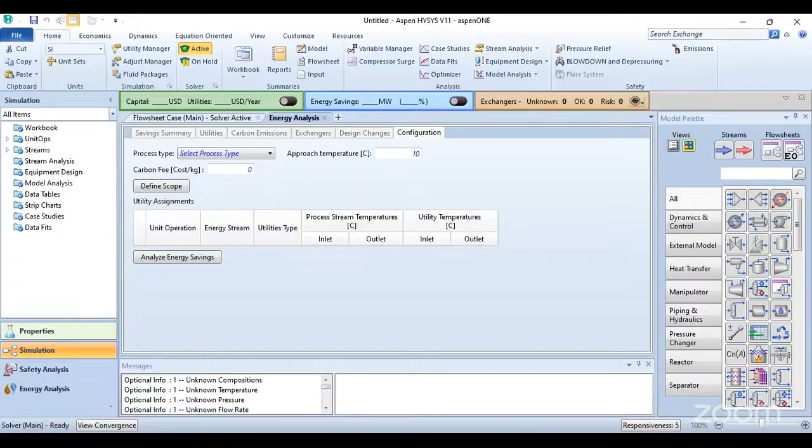So secondly, I would also like to know if you have used Aspen Hysys before, or rate yourself. Are you beginners, intermediate, or advanced? But I know that there are some professionals that are also joining this session. So I would like to know if you're a professional, a beginner, or you have intermediate knowledge. If you also haven't used Aspen Hysys before, I would also like you to indicate, so that I know how I will break down the class. If I know that more persons are beginners, I'm going to take it at beginners level. But if I know that there are more advanced persons here, I don't need to start teaching them beginners stuff.

So yeah, those of you just joining, I would also like you to introduce yourself. Are you a student, a graduate, you're working? Okay, we have more beginners in training. Wow, that's good. Okay. Wow. Okay. We have someone from Cameroon. Sixtus. Wow. Nice meeting you, Sixtus. You said you're a student. What course are you studying? Chemical engineering, petroleum, gas engineering? What course exactly are you studying? So for those of you that are chemical engineering inclined, or you studied chemical engineering, please indicate, be it undergraduate or graduate. Then those in petroleum also indicate. So represent the department or your course of specialization in the chat box.

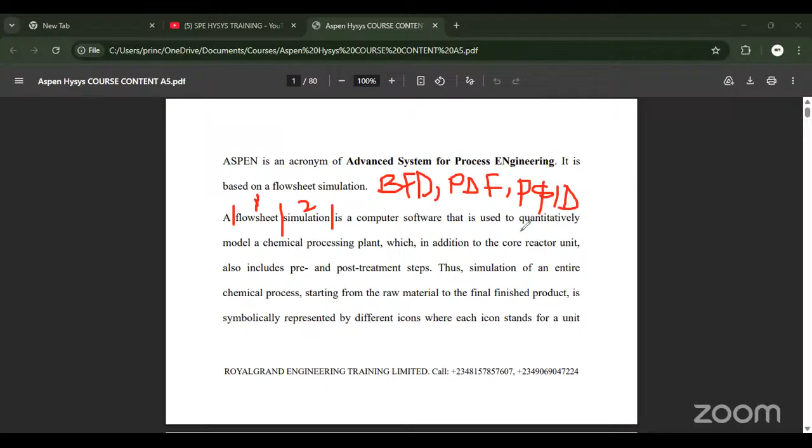We have our BFD. We have our PFD. So I would like someone to tell me the full meaning of this PFD. And we also have P and ID. So these three are diagrams that show you stages of a process. Now, I would love someone to tell me the full meaning of BFD, that of PFD, not PDF rather, PFD, and P and ID. So I'll be waiting for that in the comment section.

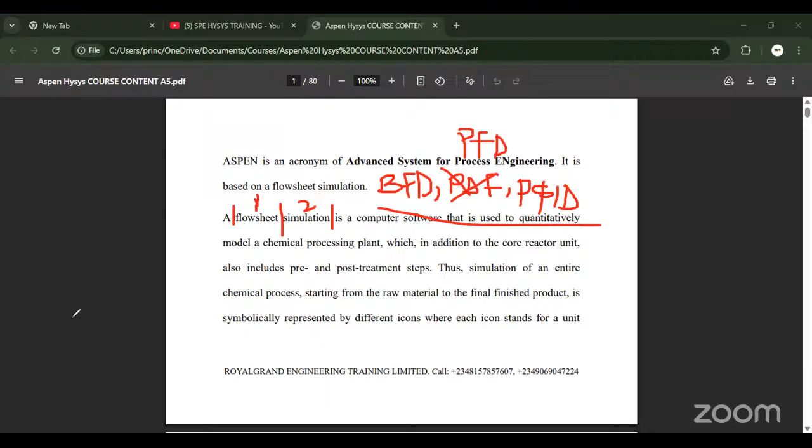So while I'm waiting for your input, I want this class to be interactive. Now we are also going to look at a simulation. When you say simulation, what does simulation mean? So what does a simulation mean? A simulation is basically trying to replicate how a system in reality is going to work in a virtual space.

So I'm going to pick examples that are outside engineering. For instance, let's use road safety or car riding. We want to know the impact a car is going to have when it collides with another car, maybe running at 150 miles per hour. Now, we won't carry somebody like, let's use Francis. Yeah, Francis, identify yourself. We won't tell Francis, come and drive a Lamborghini and make sure that you are riding at 150 miles per hour.

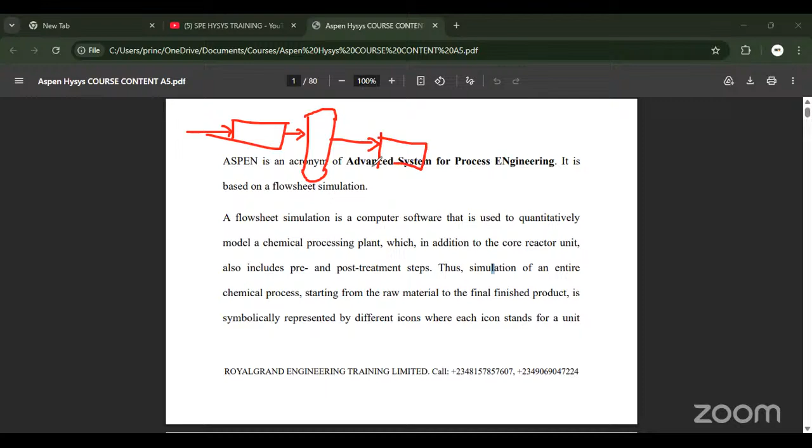This is the steps. So we have something like this. Basically, you all must have seen a PFD before. You have some of that in here, whatever this is going to represent. Then we have our output. This entire process from here up to this point is the processing. This is where processing comes in. Then you have here inputs. So that's what we are saying here: simulating an entire process starting from the raw material up to the finished product.

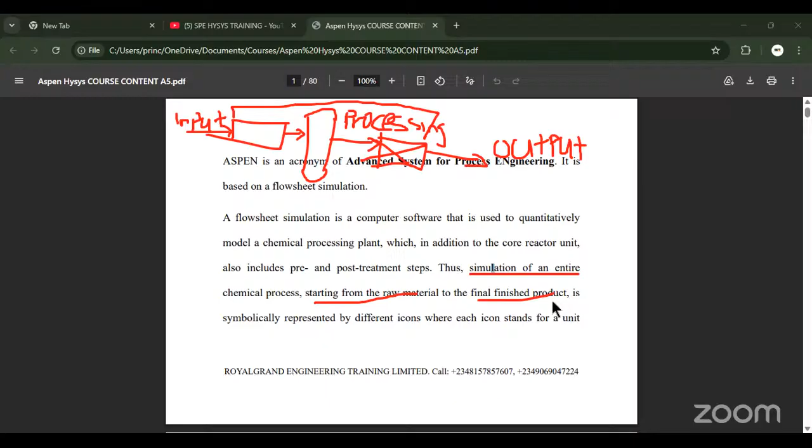And it is symbolically represented by icons. So if you have seen a PFD before, process flow diagram, it is represented by icons. Those machines, your furnace, your separator, your heater, your heat exchanger, your cooler, your compressor, your pump, all those things are represented by an icon. This icon represents each unit or each equipment.

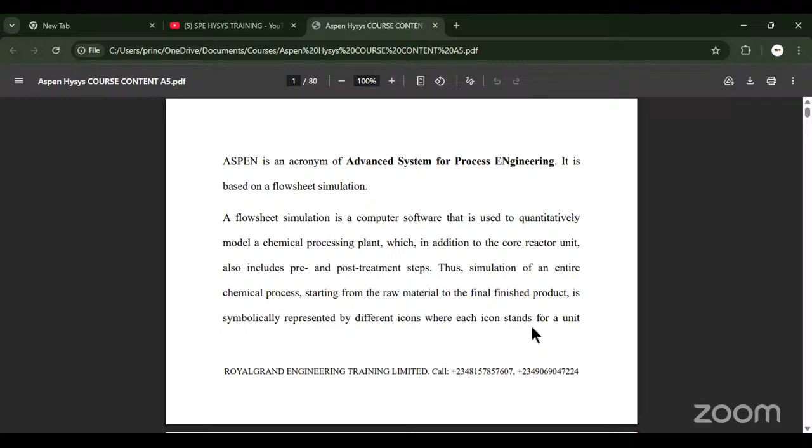Each icon stands for a unit operation, chemical process, input and output material stream. Now, in order for me to know that you guys are following, what's the difference between a unit operation and a chemical process, or a unit operation and a unit process? We can call this unit process. So what's the difference between a unit operation and a unit process?

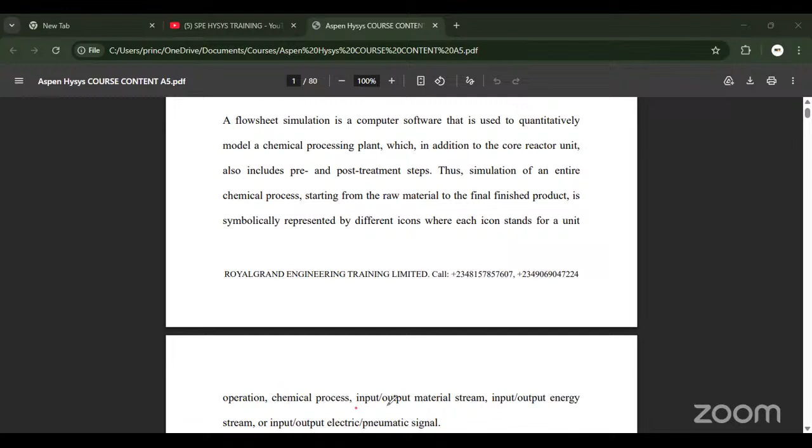HYSYS is basically just one part of the entire system. You cannot model or simulate what you don't understand. Now, imagine if you had not gone through university and somebody is saying something like a feed, the feed, design basis - you won't understand those stuff. You can train anyone, maybe an O-level, yes, this is the icon, if you want to add something use this, click here, click here. But that does not mean that person is a chemical engineer. It does not mean that person is a process simulation engineer. It's for you to know the core basics, the foundation, the intricacies of chemical engineering, those theoretical aspects. So all these are necessary, and that's why I need to start from the basics to make sure everyone is following. We all know what is input and output material stream, input and output energy stream. Clear, all this?

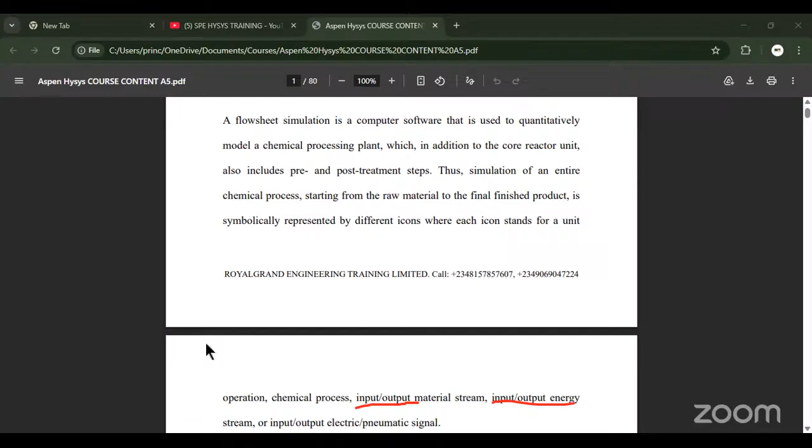Okay, now why HYSYS? What does it enable us to do? One, it helps us conduct what-if tests. This what-if test can be seen when you are doing your PSV, which is a pressure safety valve. You want to do your PSV sizing, that's for safety analysis. You are going to carry out some scenarios like: if there is over-pressurization in our separator, what happens? What if there is a fire incident? What if there is over-pressurization? What if there is flooding? What if - so you can use HYSYS to do that.

Design specification: our pump is operating and requires this heat duty. Now we need to design this pump to know its operation curve and give it to the mechanical guys for them to do procurement. Also design specification for our distillation column: how many stages? If we know the amount of stages we need, we can design it. Or if we don't know the amount of stages, what amount of stages will give us this percentage purity?

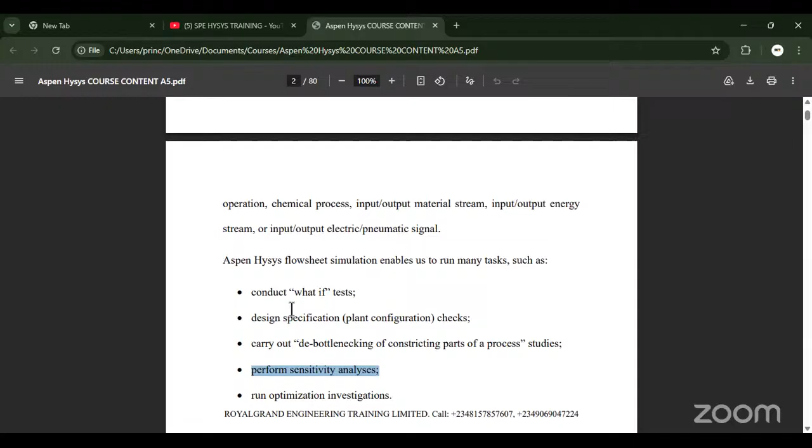Then running optimization investigation also. So we can also design better plants and increase profitability.

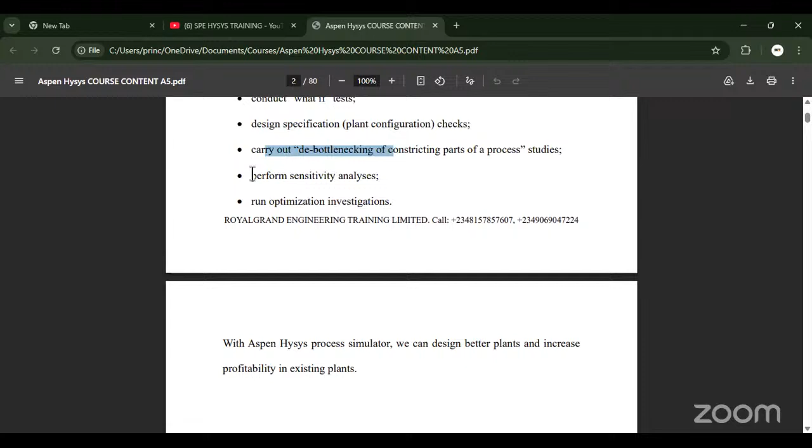Now imagine if previously this train was giving us 8,000, and after we carried out the simulation, carried out the de-bottlenecking, performed sensitivity analysis, and ran optimization investigations, we are now able to get 10,000 barrels per day. First of all, we have designed a better plant. We have also increased the profitability of that existing plant.

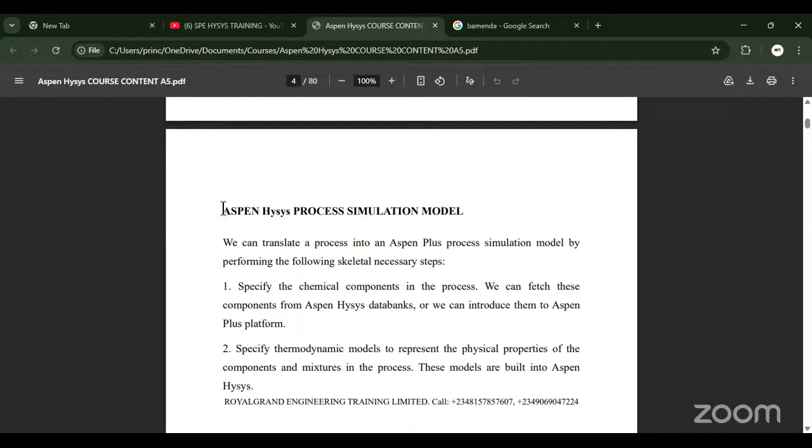Okay, so as Aspen Hysys process simulation, you can translate the simulation model, or you can carry out a simulation by doing the following. There are 5 steps in this. So the first step is to specify the component. In order for you to do that, we have an Aspen Hysys database.

Specify the thermodynamic model to represent the physical properties of the components and mixtures in the process. This is the second step that needs to be taken. More explanation on the thermodynamic model will take place in the paid class which I talked about.

So now this second step is very vital. We all know that if you are solving the wrong question, you cannot get the right answer. An Aspen Hysys thermodynamic model is basically the center point, the center of everything that you are doing in Aspen Hysys. If you pick the wrong thermodynamic model, every simulation you carry out from beginning to end is going to be wrong. So knowing the correct thermodynamic model saves you a lot.

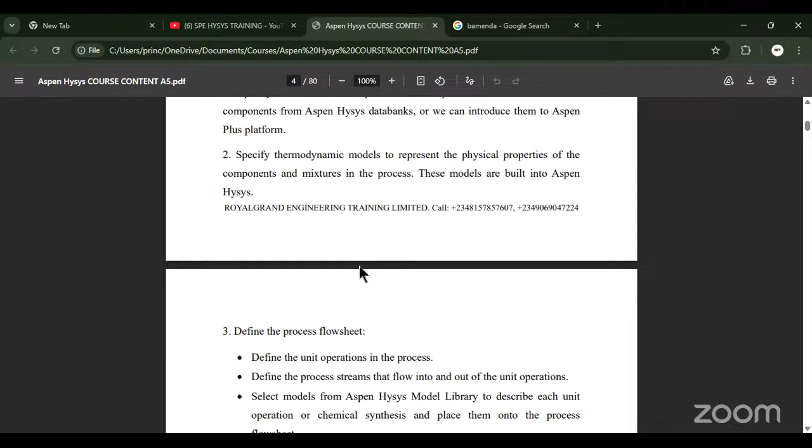So there are standards to all this. For those of you in the oil and gas sector, there are specific thermodynamic models we use. If you miss it, you have missed it. We are going to go deeper into that and explain it fully in the main session that is coming up.

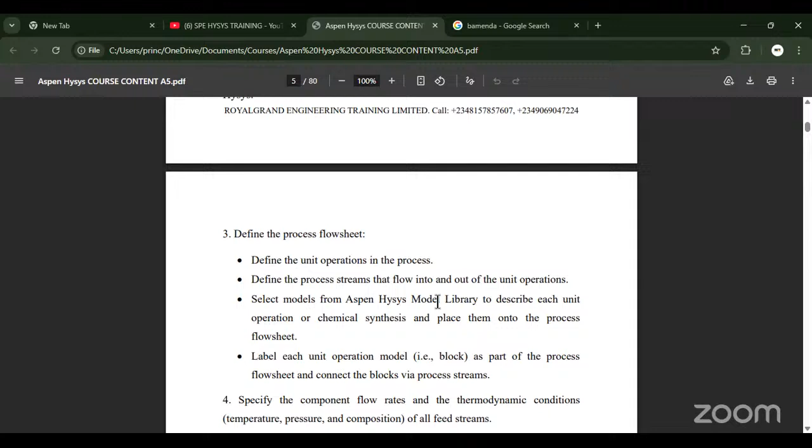Now there are different models there, which when we get to that, we are going to take a few examples and carry out real life simulation in our next class tomorrow.

The next thing we need to do is to specify the component flow rate and thermodynamic condition. Thermodynamic conditions have to do with the temperature, pressure, and composition of these streams.

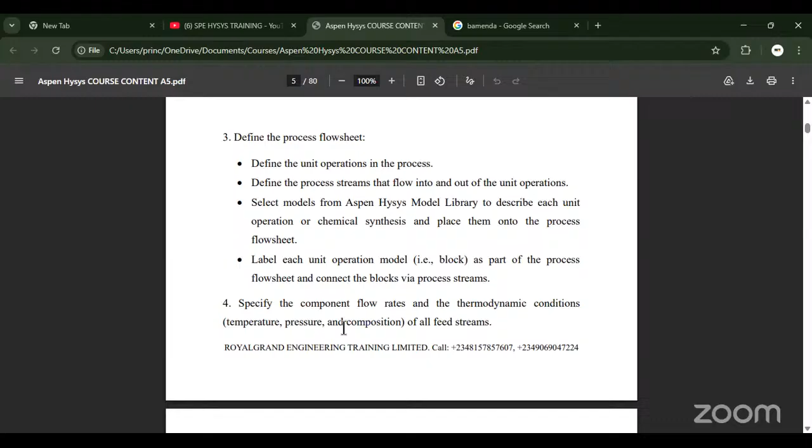Then you specify the operating conditions for the unit operations, like if you are using a splitter, you can now define the split fraction - what percentage of your feed goes to this point, what percentage of the input goes to this point, what percentage goes to this point.

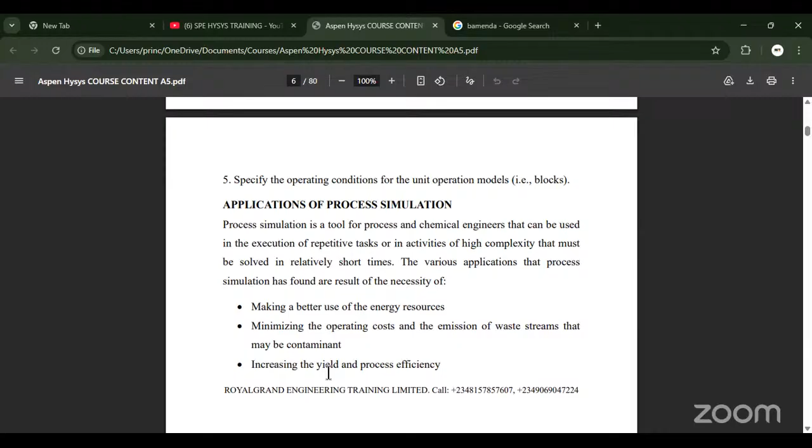In terms of increasing yield and process efficiency, I explained that when I talked about debottlenecking, process optimization, and all of that.

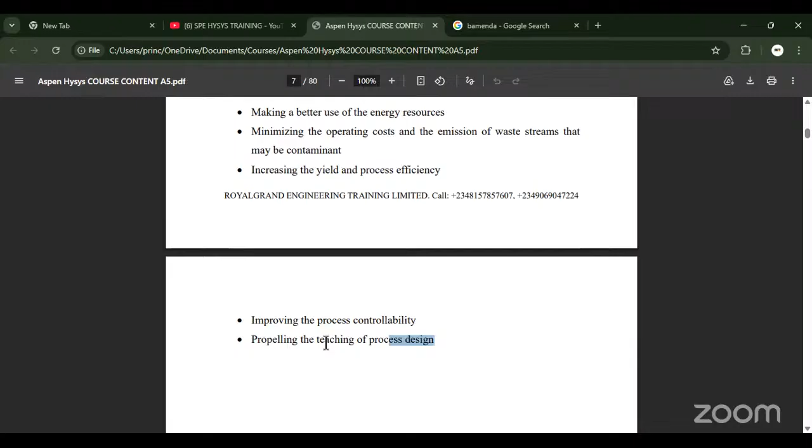So improving the process controllability, propelling the teaching of process design - one of these is the class you are taking now.

These are file extension types in Aspen HYSYS, which I'm not going to bore you with.

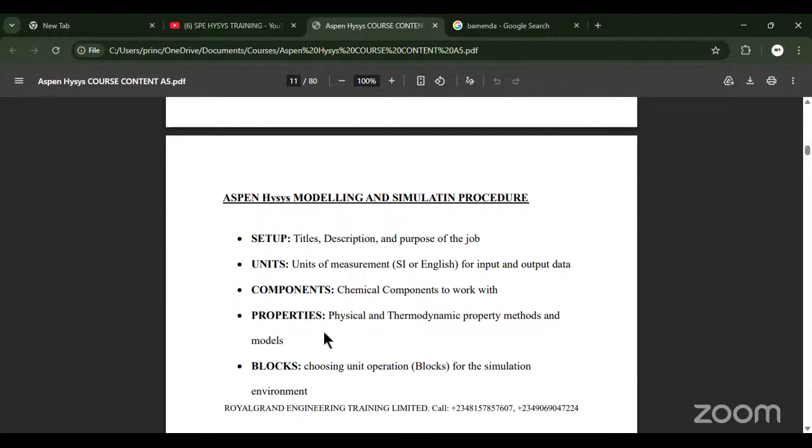So there are basically a few steps in carrying out modeling. The first thing is setup: specify your units, specify the component, the property, the block, your streams, connection, then you run your simulation.

Now let's switch to Aspen HYSYS. So before I continue, so far, are you enjoying this class? Is it flowing? Do you have any questions so far? I need to take questions before moving further.

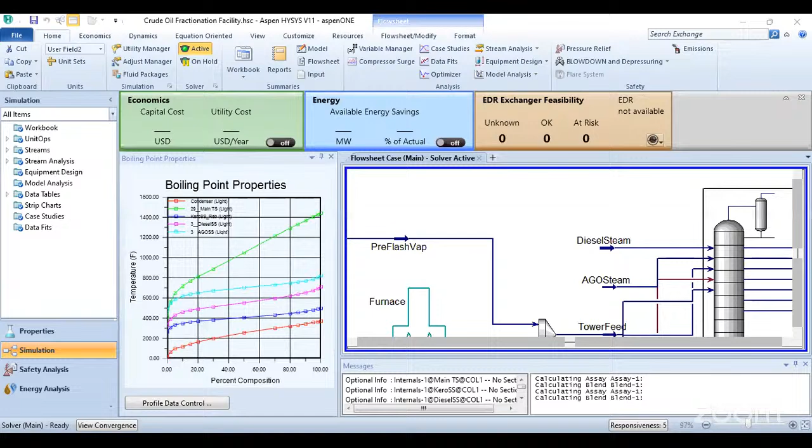So this is what we have. We have the preheated feed, and this is a two-way separator. You can see we have the furnace here. We also have a mixer here, which then goes into our distillation column. We have different fractions. We have residue, diesel, kerosene, naphtha, wastewater, off gas, and all of that.

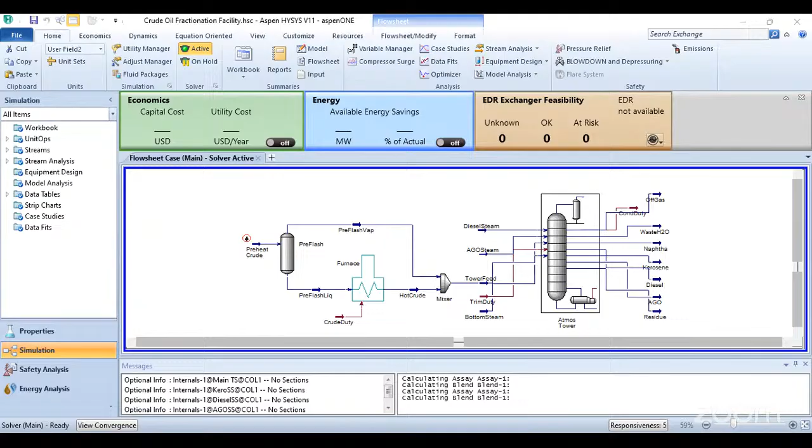So if you are looking for an example, we have one. And this applies to every other example you can find there. This is basically how it looks. You can open any of them and take a look at how it is. So I'm going to close this case now. Okay, come back to resources.

What's new? If you click on what's new, you are going to see I'm using V11, which is version 11, meaning there was version 10, there was version 9. So for V11, you can see the general improvement that was made on this software compared to V10. If you have the time, you can go through that. Exchange is accessible to only those that have the licensed version.

So from here, you can access AspenTech product training videos. You can see simulation models. You can get updates about events that are being carried out by Aspen HYSYS. You can also know about their product release, patches, announcements, and all of that. All their contents on Exchange can be found on all contents.

So I'm clicking on File and click on New. Click on Case, New Case. Okay, so from here, this is our simulation window. We have different sections. We have properties, we have simulation, we have safety and energy analysis. For now, we are in properties.

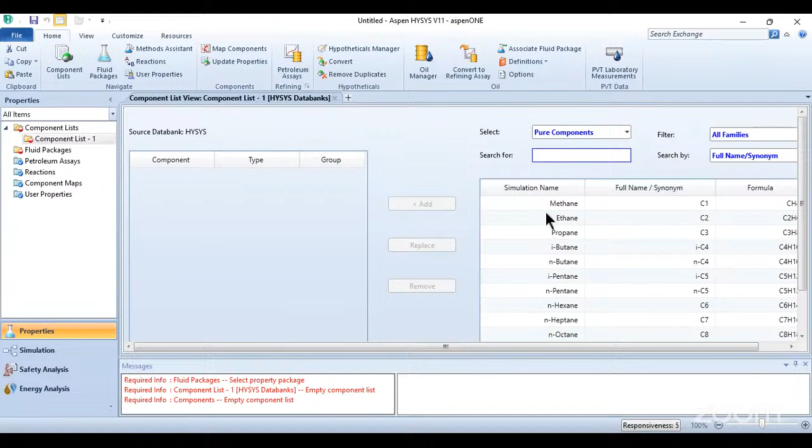Okay. Now this is Aspen HYSYS components database. We have different components here. You can see methane, ethane, propane, i-butane, n-butane, i-pentane, n-pentane, n-hexane, and all of that. So all you just need to do is to select the component you want and click on add.

Now you can see by my left, methane has moved from here. You can't find methane here any longer. Same thing applies to ethane. Ethane has moved to my left. You can see it. Now, whatever is on your left is the component you have selected. Whatever is on your right are components you have not selected that are ready for use.

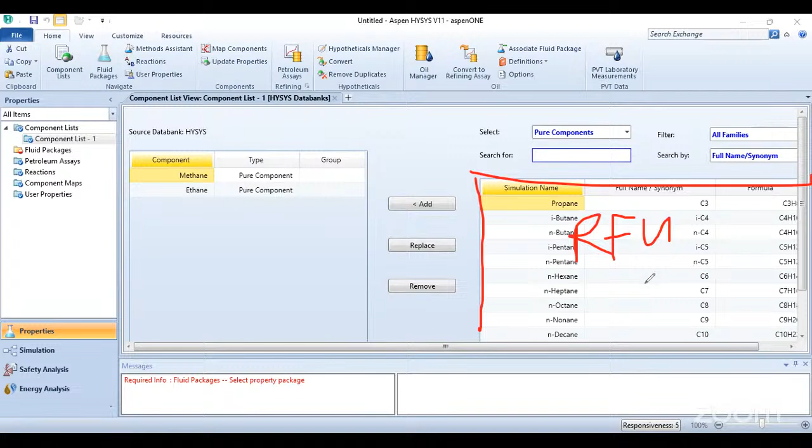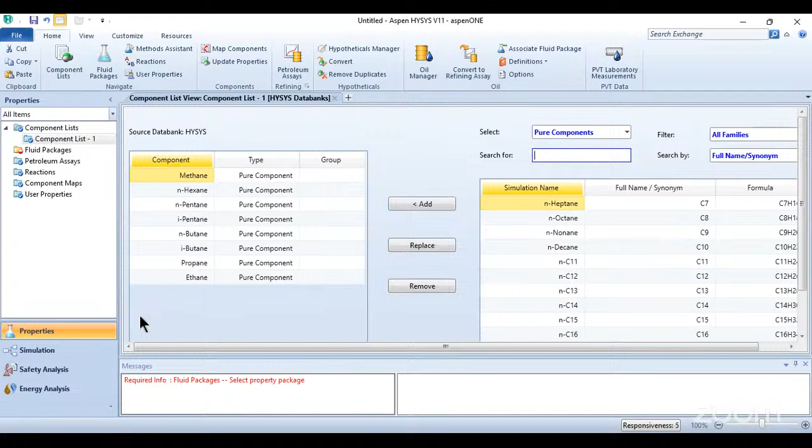So the fact that all these things are here does not mean you are using them. So I'm adding more components to my component list. After you have done that, the next thing I'm going to do is to select my fluid package. We are going to go deeper into this fluid package. And this is what I said, that if you add the wrong fluid package, you are going to get the wrong simulation results. So for this, I'm going to select Peng-Robinson.

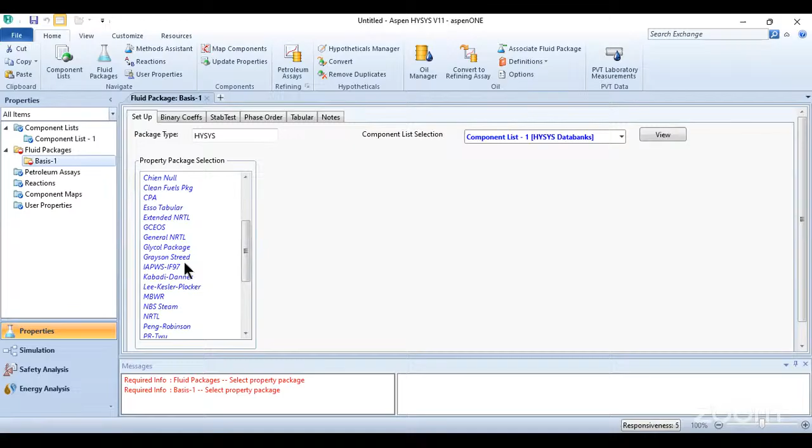Don't know if anyone has a question. Okay, there's no question so far.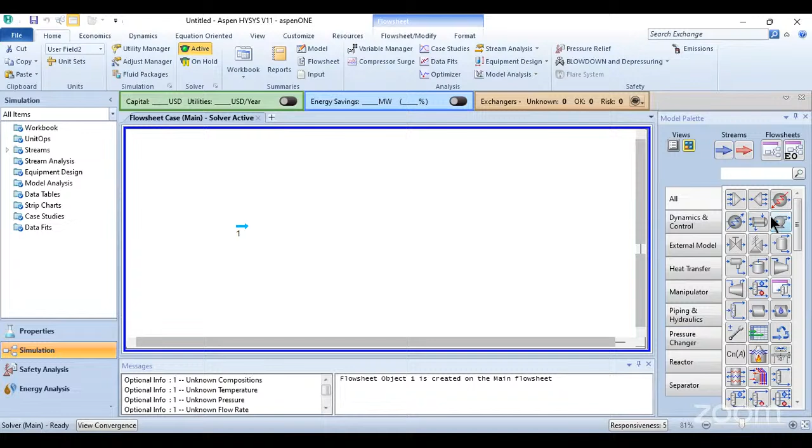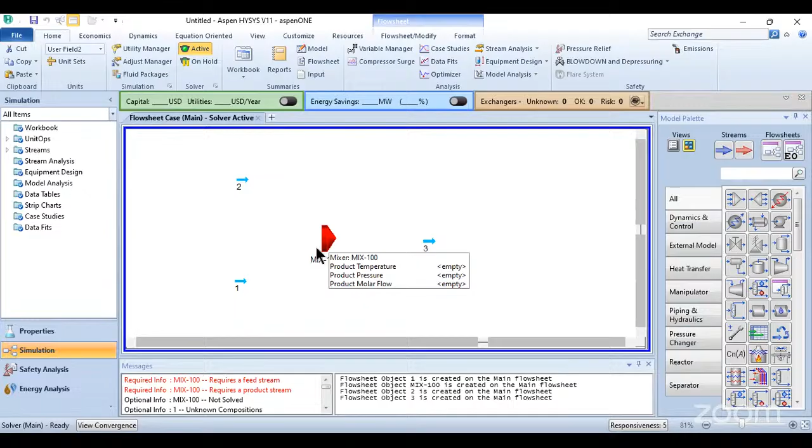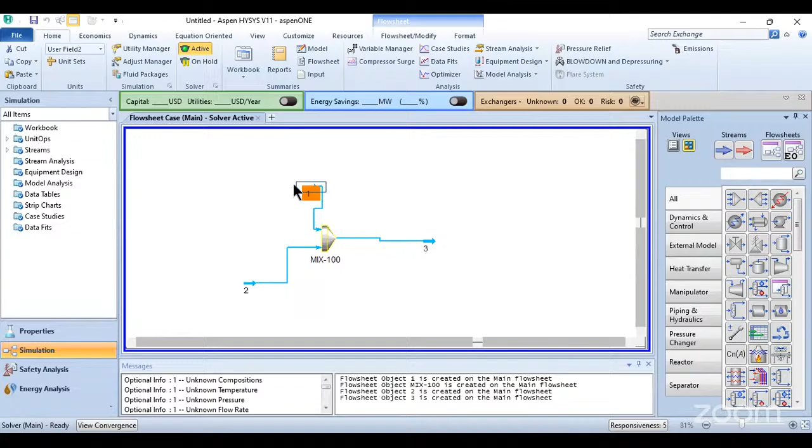So this is it. You click on the material stream, click on it and add here. Click on the equipment you want to include. I'm going to click on two material streams. Okay, so we have 3 streams here and we have our mixer. All we need to do is to double click on the mixer, then add the streams. We have stream 1, we have stream 2, we also have our outlet here. You understand? So you can see we are not yet carrying out a simulation. This is just a basic demonstration. I'm going to back up a little bit.

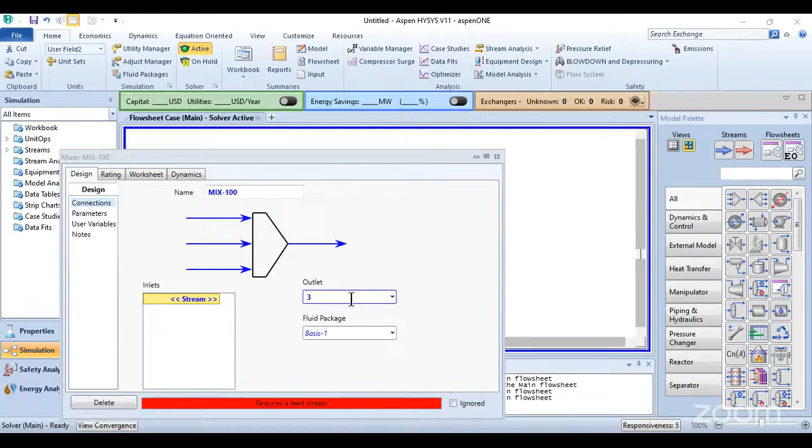Okay, now there are different color codes here. We have the color code in blue, we have the color code in red. Now, when you are doing any simulation and you have this blue color, it means there are parameters that need to be defined. The moment you add an equipment, it shows red. It means there are no streams attached to it. It's fully undefined. For your material stream, it shows this light blue, sky blue.

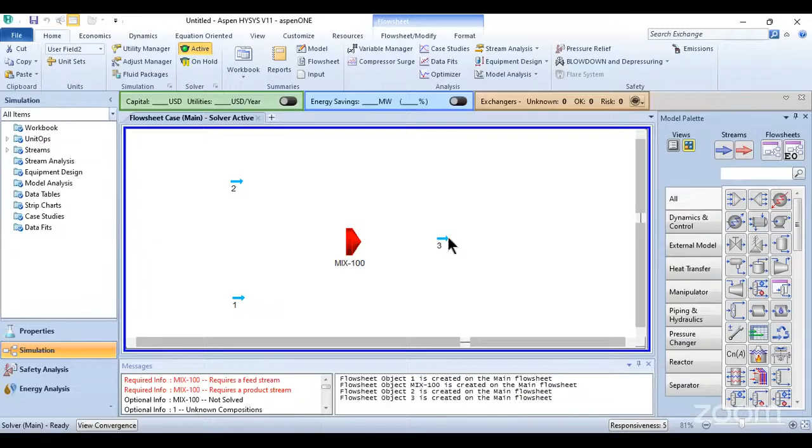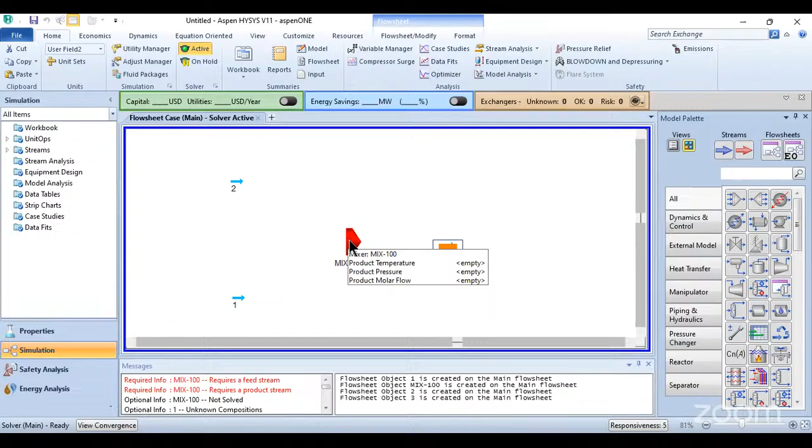Then we also have our bottom message section. It gives us warnings, what we are supposed to do, what we are not supposed to do, what we have done. If there are errors, if there are warnings, we can see that in our message box.

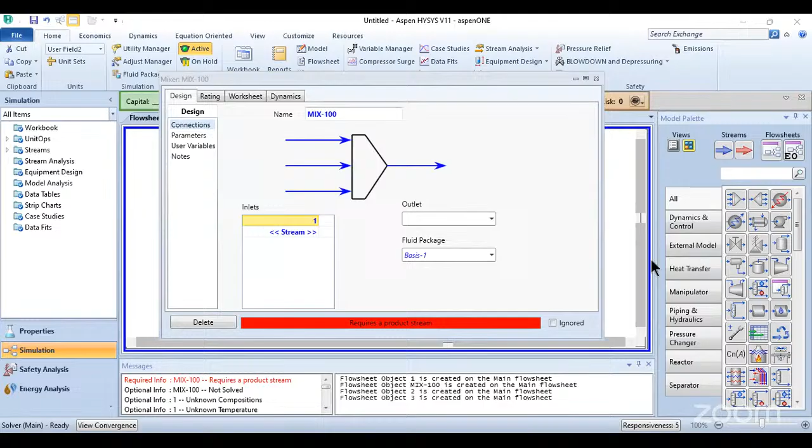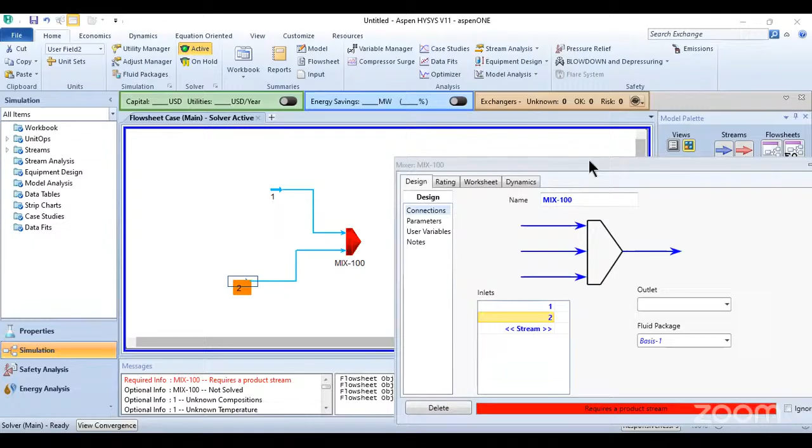Now, if I double click on this and start adding streams, okay, I'm going to add this stream. Then I add my second stream. I add the third one. You can see that the color has changed. Initially, it was red. Now it has changed to ash color with a yellow outline.

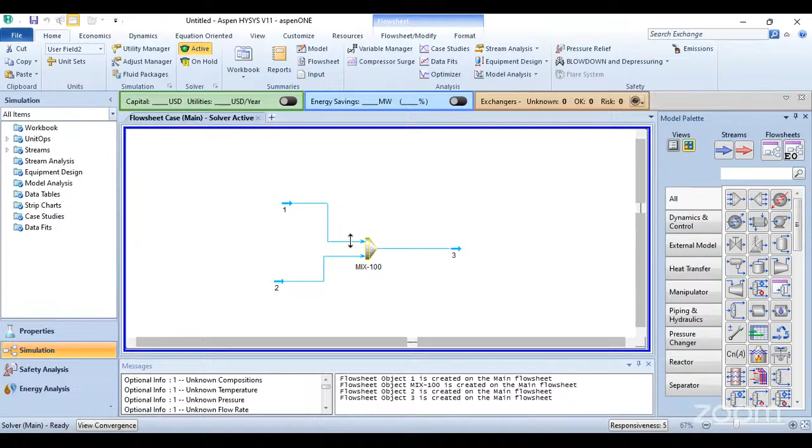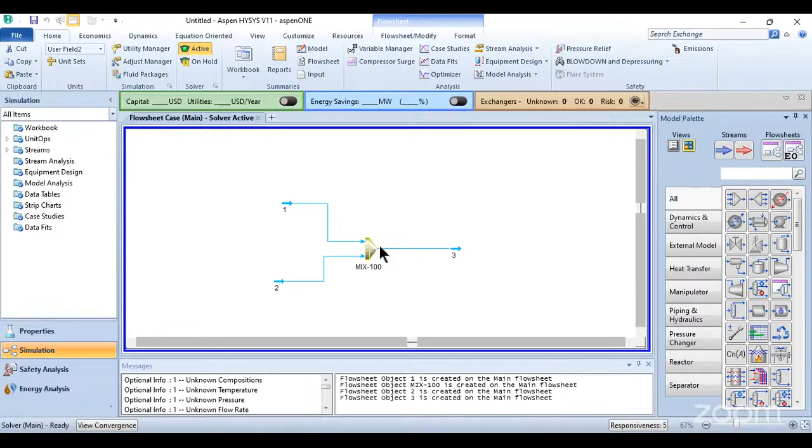Now, what this means is that Aspen HYSYS is recognizing the fact that you have given it an input stream and an output stream. But it is telling you that this equipment has not yet been solved. Like this whole simulation has not been solved. Aspen HYSYS cannot accurately tell some of the parameters. It can't solve some of these parameters. Your mixer cannot solve. So that's basically what it's telling you.

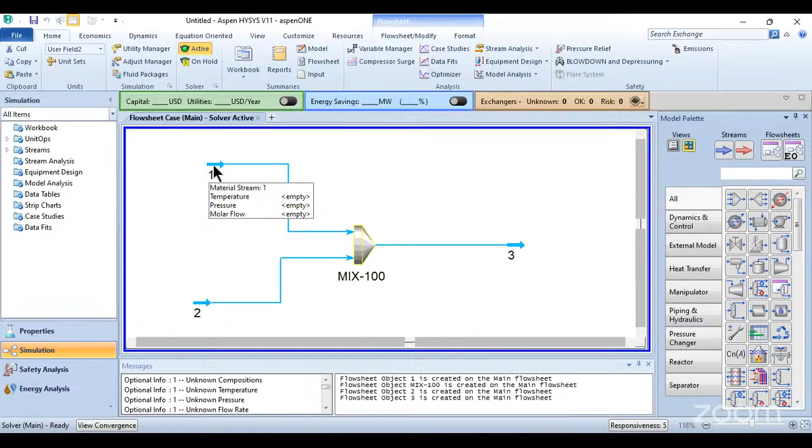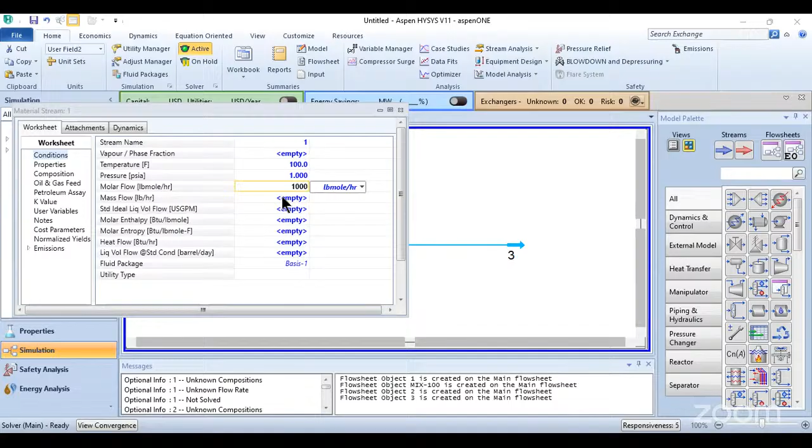So whenever you see something like this, you just know that maybe you have not defined some parameters in the input stream. So the moment we add parameters, random parameters here, Aspen HYSYS automatically calculates and gives you whatever you want. So I'm just giving random values. We are going to do all this tomorrow. So I just want to give some values.

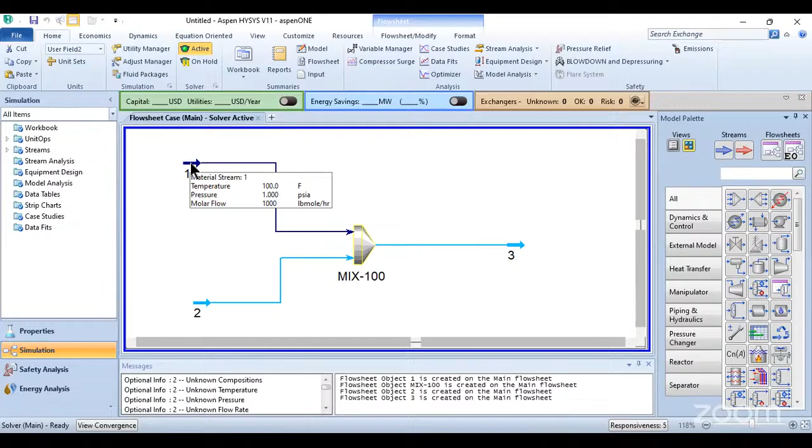Okay. So for this, you can see that we have this in thick blue, navy blue, and we have this light blue. Now, what is telling you is that for this stream you have given Aspen HYSYS all the parameters it needs. This stream has been fully calculated. But for this other stream 2, the parameters we need are not there.

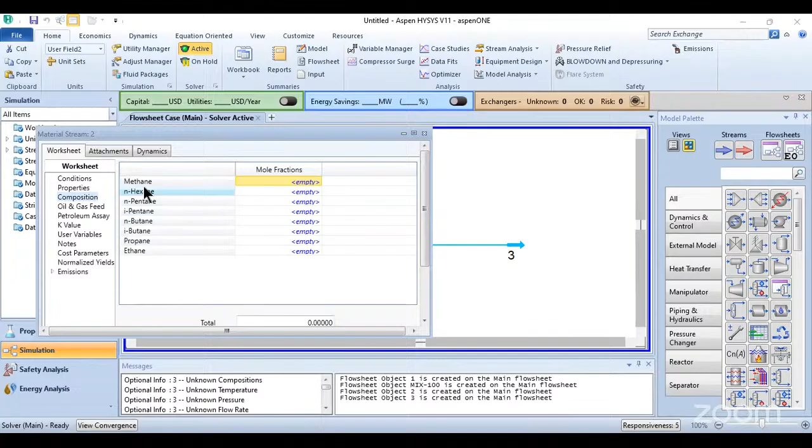And if you open it, you can see that we have not defined temperature, we have not defined pressure, molar flow, mass flow, none of that. We have also not defined the composition. We have methane, butane, propane, and for the mole fraction, nothing has been placed. But the moment we do that, you find out that this has changed to blue, and our mixer is no longer showing us that yellow outline.

Now, this is a mixer, so it means Aspen HYSYS has mixed these two streams to give us our outlet stream. So we are going to do all this in our class tomorrow. This is just a basic introduction, and we don't want to overshoot, so that everything is being understood clearly.

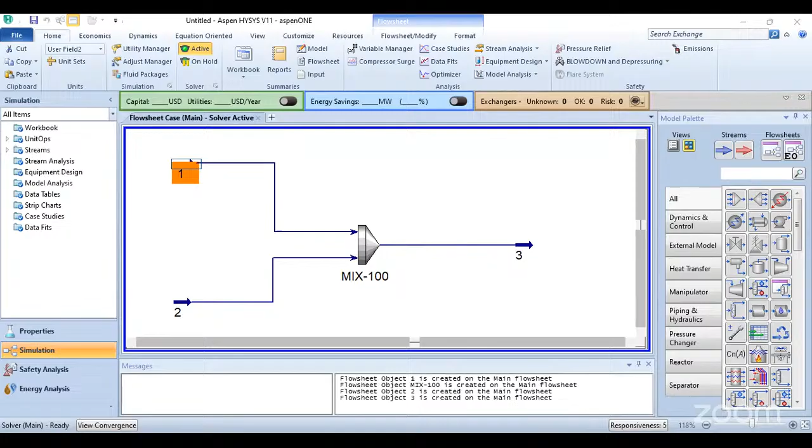Okay, someone said, why did you choose Peng-Robinson? I said previously that I'm going to explain in the paid class why Peng-Robinson is being used.

Then Franny asked, does Aspen HYSYS work with a mathematical simulation model? Yes, all simulation software use mathematical models, and they are complex and different. Each of those pieces of equipment there has its own specific mathematical model to run it.

Emmanuel said, what if we don't have some parameters, like let's say a particular parameter isn't needed for what you are working on? Yeah, you will not specify all the parameters, definitely, but they are key. You can't be carrying out a simulation and not giving HYSYS the temperature of your components. So how would HYSYS know?